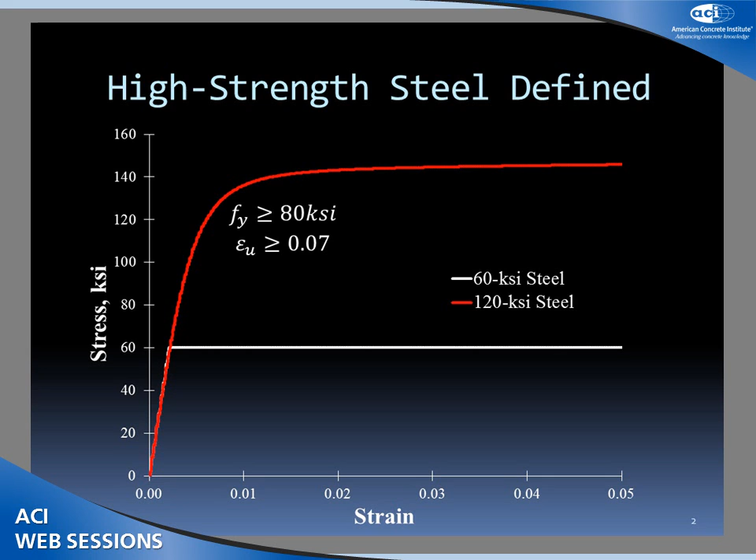For the high-strength steel that I'll be talking about, I'm referring to steel with a rupture strain better than 7%. Now that's not quite as good as standard A706 grade 60 steel, which is going to be 15% or so. But it's still not so bad.

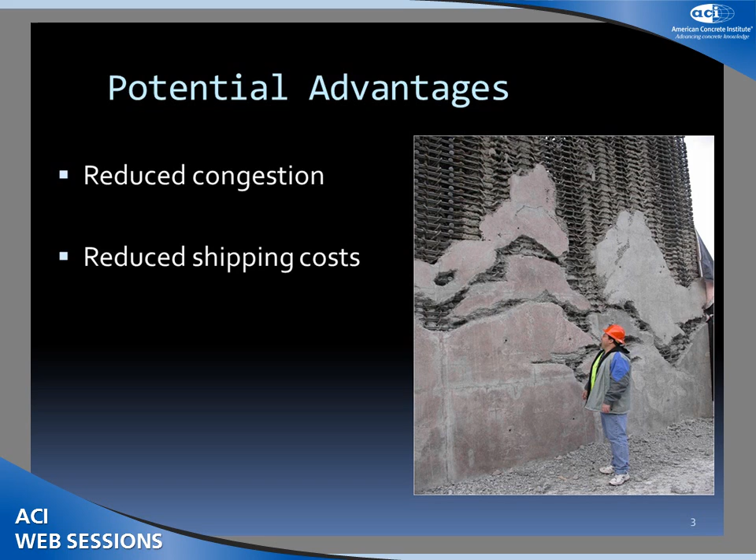And so, obviously, there are tons of advantages that everybody in part one and part two of the session are going to be talking about. But a few of them are: obviously, you have the potential to reduce congestion of the steel. Use higher strength steel, you need fewer bars or smaller bars. You reduce shipping costs. If you need half as much steel, you need half as many trucks to bring that steel to the job site. If you have half as much steel, you need half as much installation cost, essentially. So you can really save a lot of money.

The steel does cost a little bit more. Last time I looked, it was sort of proportional to the yield stress of the steel. So essentially you're paying for a force. So 120 KSI steel was about twice as much as 60 KSI steel. But once you factor in the shipping costs and the installation costs, it really turns into a pretty decent savings for a good-sized job. And finally, you reduce your environmental footprint. You produce less steel, less mining, less material costs.

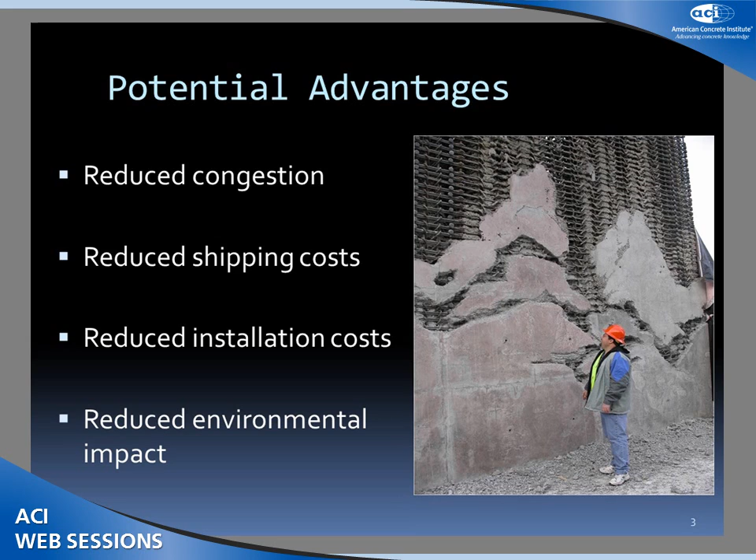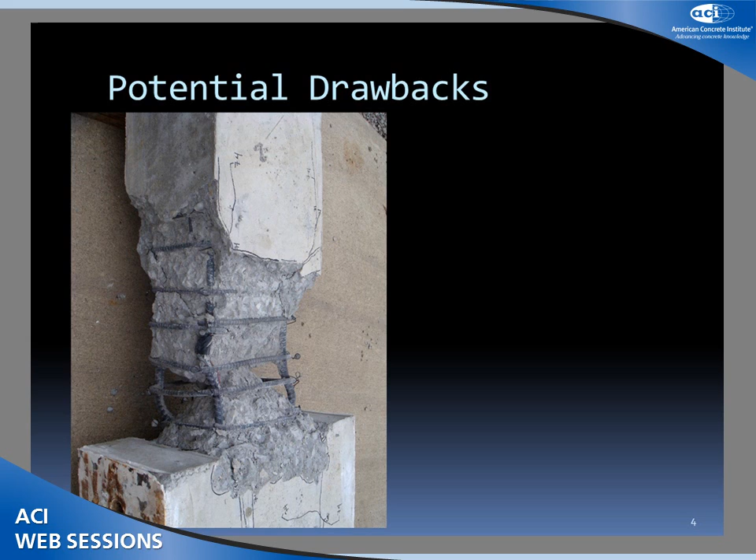But with everything, there are disadvantages. This is a photo from a test that I did a couple of years ago. This is a column that's reinforced with high-strength steel. And what you can notice, this is after I tested it and after I chipped out all the loose concrete. These longitudinal bars, they're buckled, which isn't necessarily the end of the world. But if you're using fewer bars or smaller bars, in combination with a higher stress demand on those bars, the likelihood of them buckling is higher than when using a traditional grade 60 bar.

I sort of mentioned this before, but there's a lower fracture strain of the high-strength steel. For a column, if you don't push your steel all the way to fracture, then it really doesn't matter a whole lot. For the test that I'll briefly mention, we fractured, I think, 1 or 2 bars in the specimens. Everything else was relatively ductile, more of a buckling type failure of the bars after very large drifts.

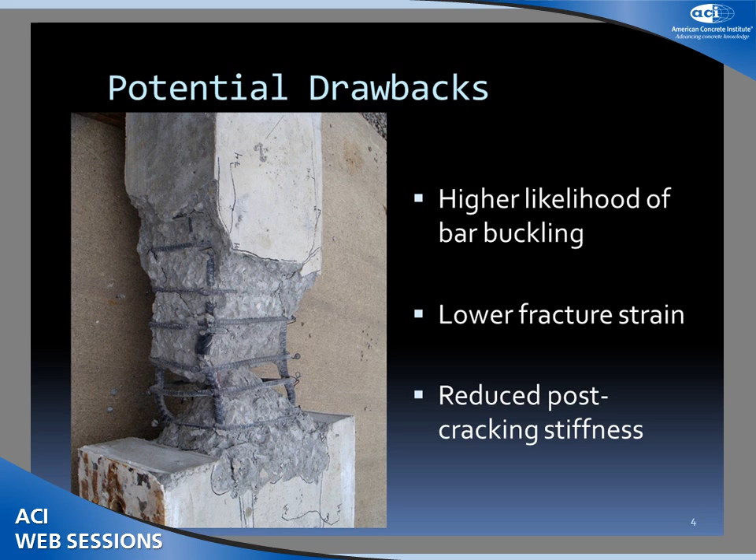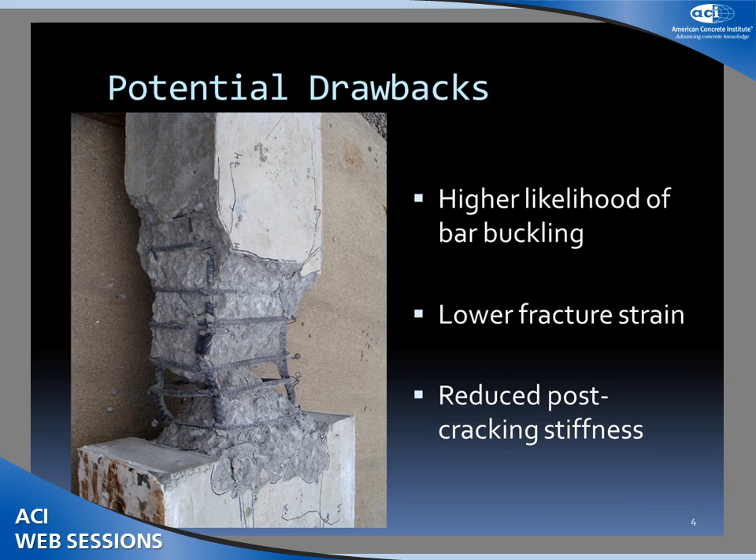And finally, what I'm going to talk about most today is the reduced post-cracking stiffness that you get out of a section that's reinforced with high-strength steel. As you might imagine, you can use less of it, but as we all know, the bending stiffness of a concrete member is proportional to the transformed moment of inertia, right? So if you use less steel, a lower cracked moment of inertia means a softer bending response.

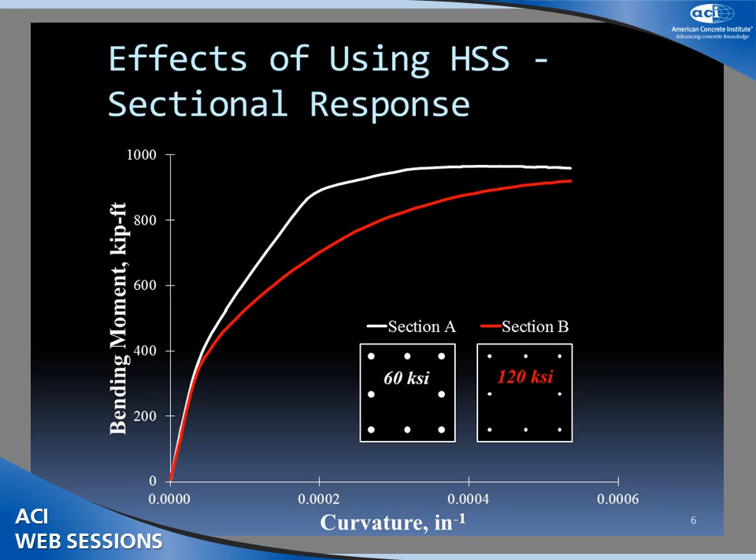I'm going to show you two plots. One is for a column reinforced with grade 60 steel, like the plot I just showed you, and the other one is using half as much steel, but high strength. This is what we see for the column with 60 ksi steel. Nice, fat loops like we might expect. And by the way, these columns have 20% f'c Ag, so it's nothing to scoff at. And the shear stress they're subjected to is on the order of 6 root f'c.

So it's pretty highly stressed in shear. And this column ended up having a drift capacity of around 4%. We ended up buckling some of the longitudinal bars here, but really stable loops, to 4%, even further.

If I compare that to a comparable column with half as much steel, but 120 KSI, this is what we see. Skinnier loops, softer initial stiffness, but we see essentially the same drift capacity, around 4 or 5%. So still pretty good. We ended up buckling a bar in compression here, and then reloaded the other side and buckled a bar in compression on the other side.

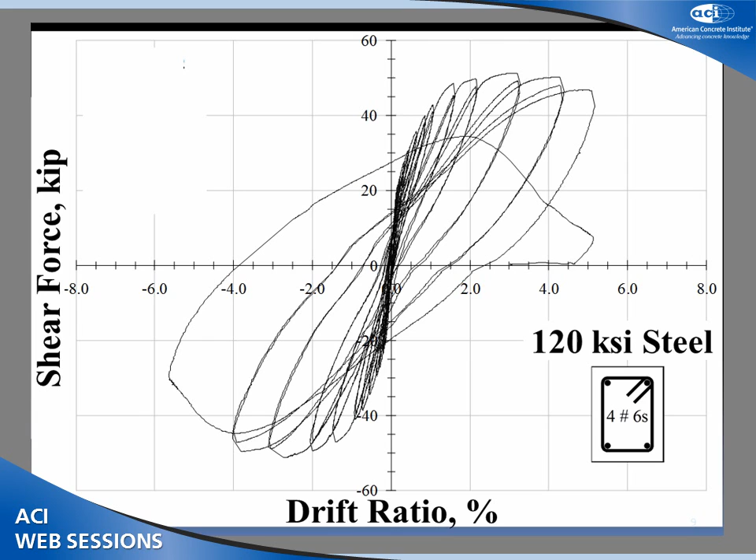And so we idealized this for our later computer analyses with these hysteresis models. The white one being a column reinforced with 60 KSI, the red being reinforced with 120 KSI. And really there's two main differences here. Both stem from the same thing. It's the difference in post-cracking stiffness.

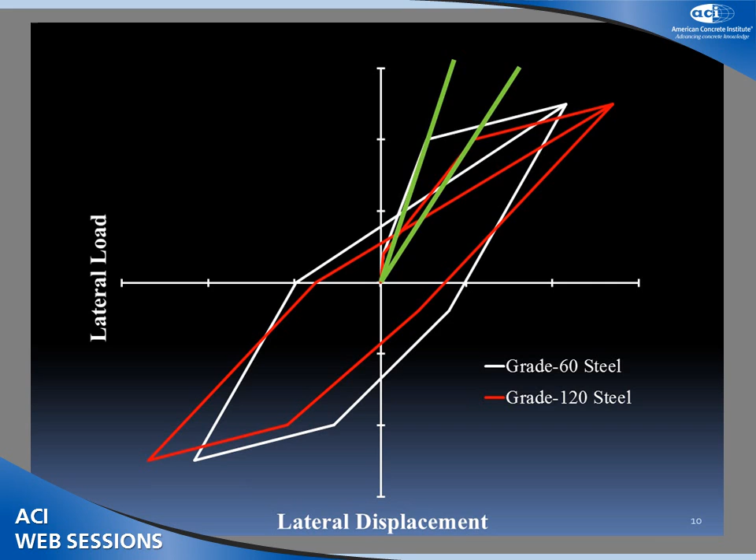And so here's essentially the secant stiffness to yield for the grade 60 steel column. And here's the secant stiffness that we assumed for the other one. And for the analyses that I'll talk about, we essentially assumed that the stiffness was half. And so because that stiffness was half, we ended up getting these thinner hysteresis loops dissipating less energy than the grade 60 KSI column.

So let's zoom back again and start talking about what we see not on a member basis, but beyond that on a frame response. What we want to know is, does this change in stiffness result in an increase in drift demand in an earthquake? Is it higher? Probably, off the top of your head.

How much higher? I could argue that one possibility is it's 41% higher, or root 2. If we change the stiffness by half, T equals the square root of M over K, you end up with the possibility of having 41% higher drift demand. And so for a linear elastic system, this really happens to be the case, but not necessarily for low periods.

For low periods, if I come into my spectral displacement period plot and look at a given period and a given displacement, and then increase that period by 40%, which is square root of 2, I end up getting up to 100% more drift. Again, that's for a linear elastic case. If I look at a longer period, say 1 second, that's that 41% I was mentioning, the square root of 2. So for a linear elastic case, we could really expect to get about 40% extra drift.

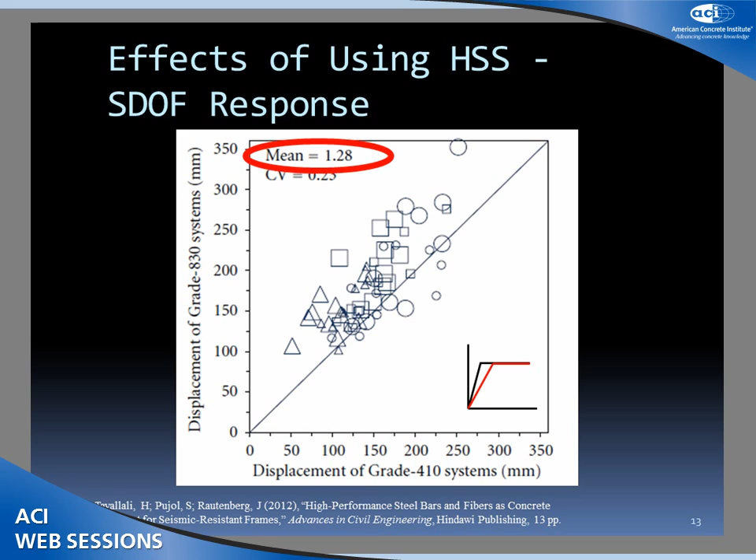But that's just a single degree of freedom system. As we start moving up further, we'll look at a multi-degree of freedom system. And this was really the heart of the paper: we modeled 4 different frames, one 3-story, one 6-story, one 12, and one 20, and we modeled it 2 ways. In one, we assumed that all beams and all columns had grade 60 steel. In the other, we assumed that all beams and all columns had grade 120 KSI steel.

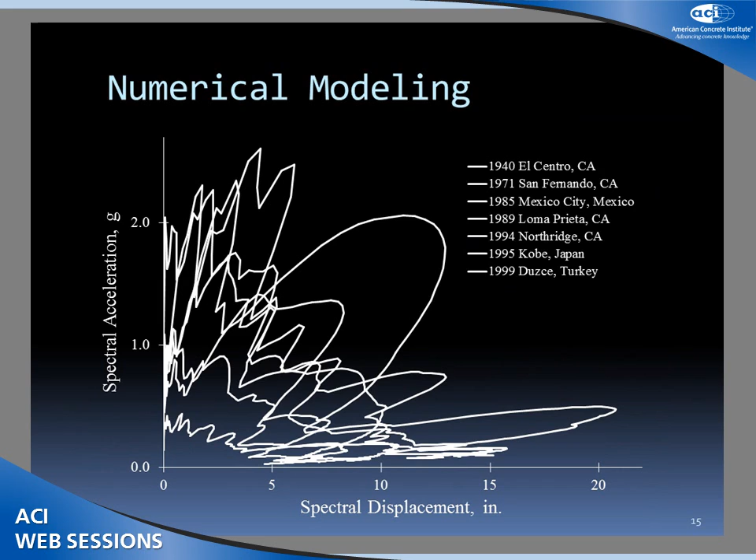And we shook them in the computer with 7 ground motions. And this is supposed to look like spaghetti because it's just showing that we used a wide array of ground motions, large differences in frequency content, large differences in amplitude, and we subjected all these to nonlinear time histories and looked at the results.

And this is a plot that's similar to the one that I showed you before, but this is for these multiple degree of freedom systems. And again, points lying above this line of unity means the drift in the buildings with conventional steel was less than the drift in the buildings with high strength steel, and vice versa. And what we see is this.

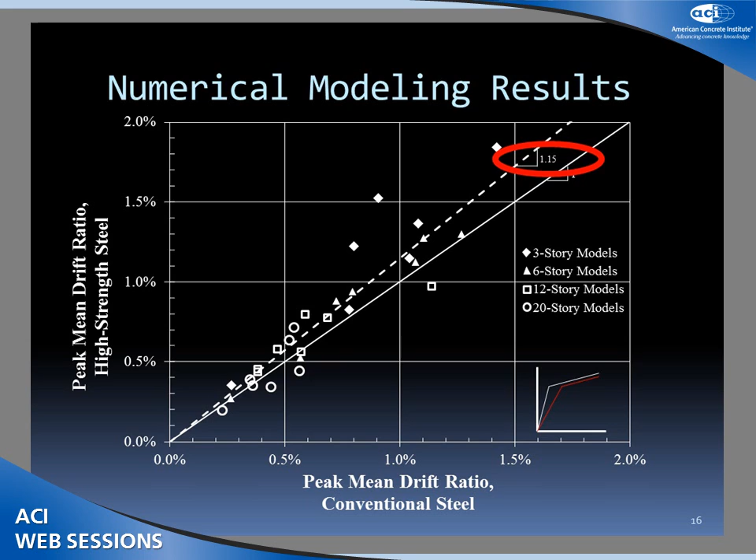And so the average here is essentially 15% of a drift penalty for using high strength steel for a multiple degree of freedom system. And so the penalty decreased as the number of members increased, right? In the single degree of freedom system, you end up with a 28% high strength steel penalty. But now more members are participating, more members are cracking, more members are yielding. It's shifting that nonlinearity to more than just one member. And so the penalty is a lot less.

If we take this a step further and look at what everybody uses the term hybrid for now, so I figured I would use it also. I modeled a hybrid building in that the columns I assumed were using high strength steel, but the beams were conventional steel. In a well-proportioned building, we know that you want to proportion it so that the columns are stronger than the beams. And so really that pushes a lot of the nonlinearity into the beams. The columns will crack a little bit, but they're not supposed to yield. That's by design. That's how we do it.

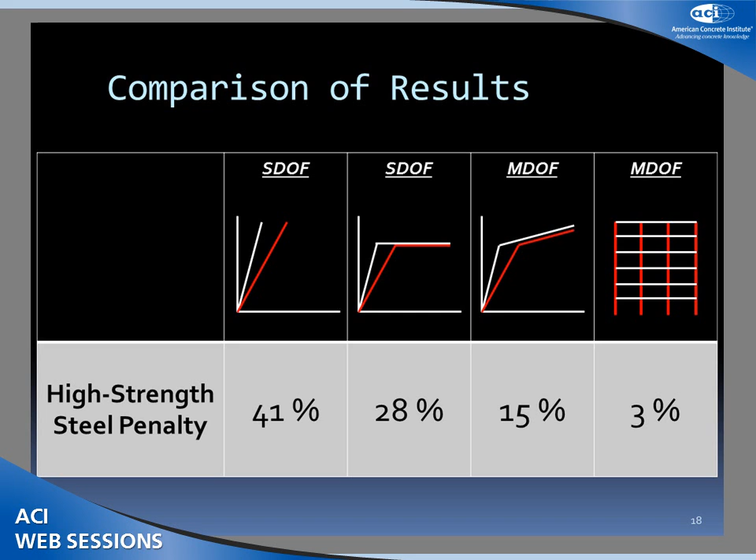And so to summarize what I talked about, this is what we see from the 4 different types of analyses I mentioned. With a linear elastic system, we see a penalty of about 41%, square root of 2. If we start introducing nonlinearity into the single degree of freedom systems, that drops to 28%. As we increase the number of members, we further drop to 15%. And then if we force all that nonlinearity into members that still have 60 KSI steel, it all but disappears. And it's pretty interesting.

And so to summarize, I just have a few conclusions. One of them is that for a multi-degree of freedom system with all the members reinforced with high strength steel, you use half as much steel. It takes much less energy and much less material to build, a lot less steel. And you really only end up with 15% extra drift demand. In addition, as you increase the number of stories, the penalty decreases. But what's very important is that all of these are just numbers on paper. They really need to be looked at through real, physical tests. Actual building models need to be shaken with these high-strength steels to see what the actual behavior is. And so with that, I'll finish and ask if anybody has questions.